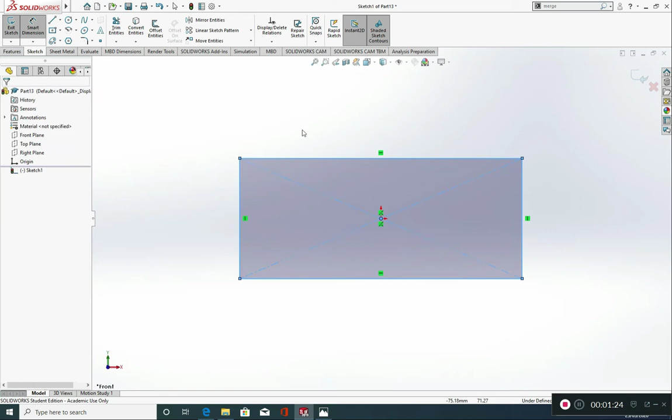So I've opened up SolidWorks and I've gone to File, New and Part. I've ensured that sheet metal is available on the tab by just right clicking on these tabs and ensuring that sheet metal is ticked. I'm going to go into a front plane, normal to, sketch, and I'm going to select a center rectangle. I'm going to sketch from the origin point and I'm going to give this some smart dimensions. So I'd like this value to be 150 millimeters. I would like this value to be 80 millimeters.

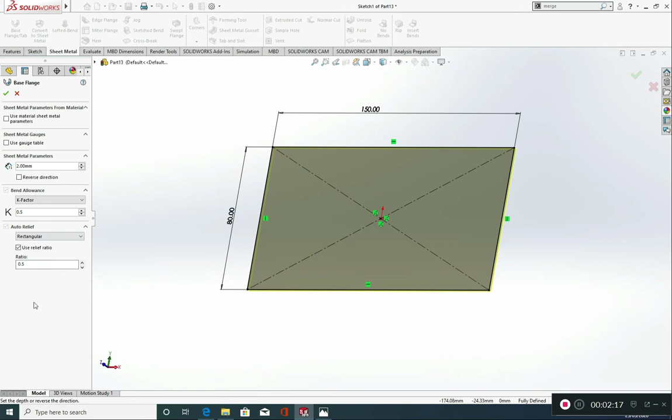I'm going to go into sheet metal. I'm going to choose base flange tab. I'm going to keep the thickness at 2 millimeters. The K factor is going to remain at 0.5. This is good for looking at bend allowance. And you can manipulate the K factor if the equations that you're looking at deem necessary to change this. Auto relief, okay, that's going to remain as well at 0.5. So I'm going to click the OK button, and we've got a sheet of metal there, 2 millimeters thick, 150 by 80 millimeters.

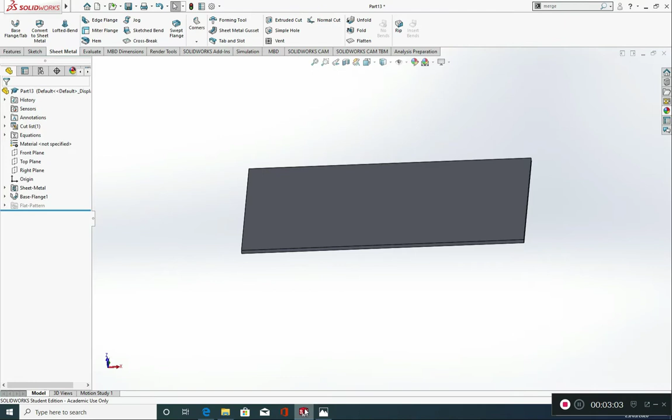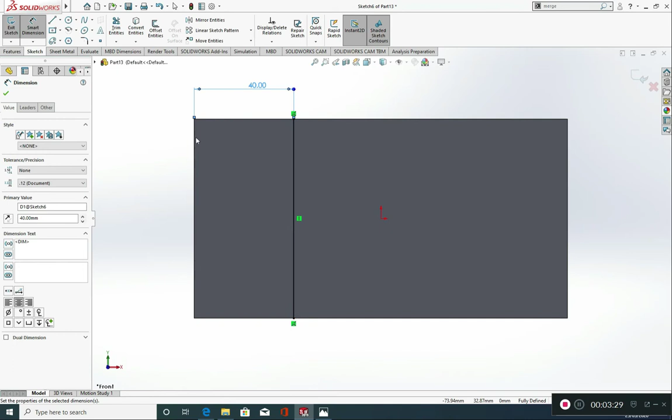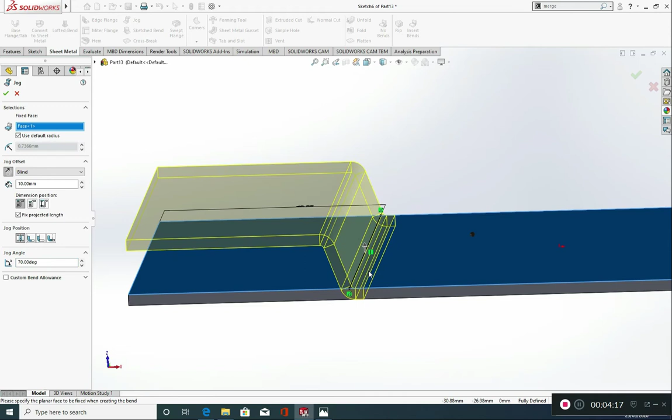So I'm going to go into sheet metal. I'm going to select jog, and the fixed face is here. So left click, and you can see what's happened now is it's jogged from that 40 millimeter line that we put in place right at the start. I want this to be 10, and I want to select the outside offset. The jog position can remain with the bend center line, and I want it to be 90 degrees. You can change this, so you could change it to 70 for example, and the jog would update. However, we want it to be 90 degrees. And green tick.

Perfect. Hopefully you followed that and you're in the same position as me. If you are, well done so far.

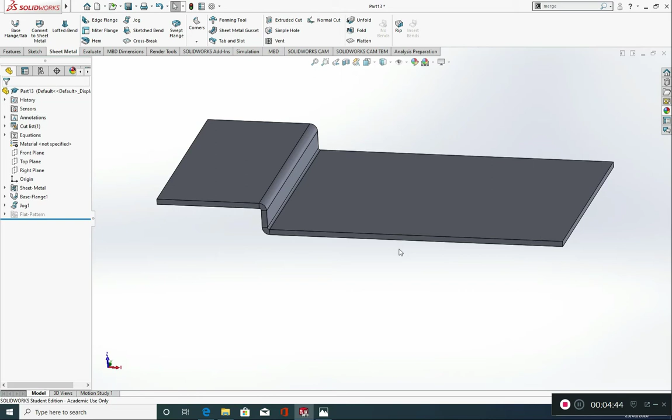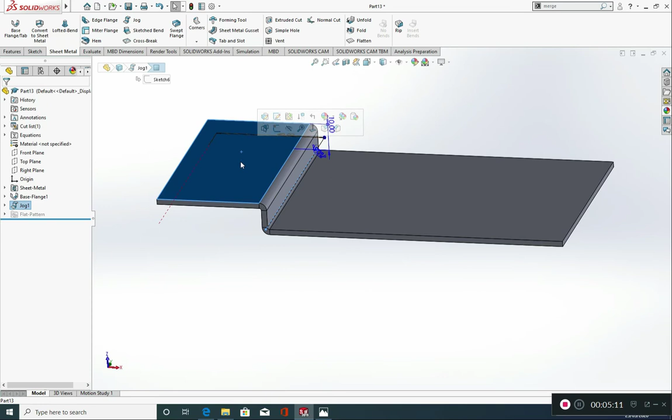Let's go to sketch, let's go to circle, and let's just sketch a circle in and give it some smart dimensions. So smart dimension, from this edge to the center I want to be 10, and from this edge to the center I want to be 10. I would like the diameter of the circle to be 5. Green tick. And we're now going to produce a linear pattern from this.

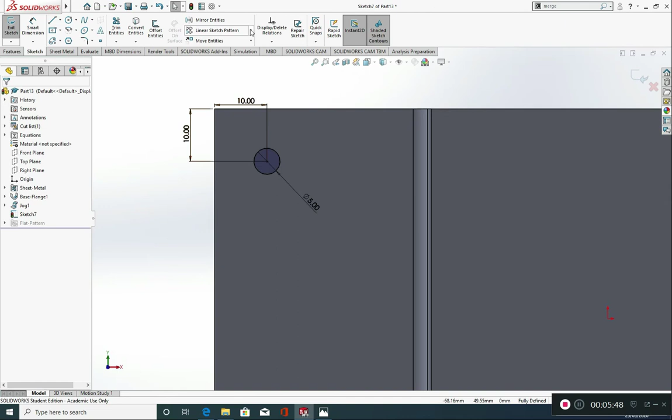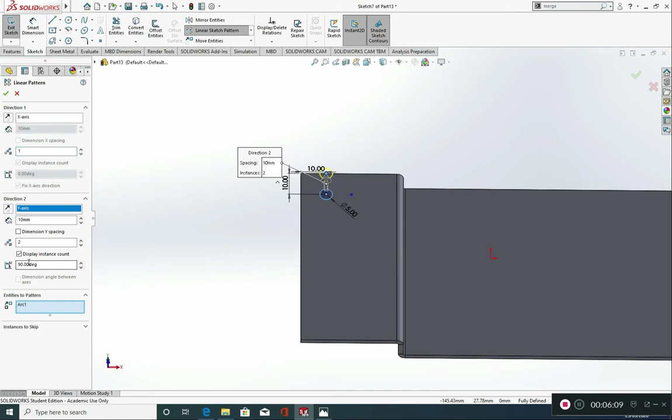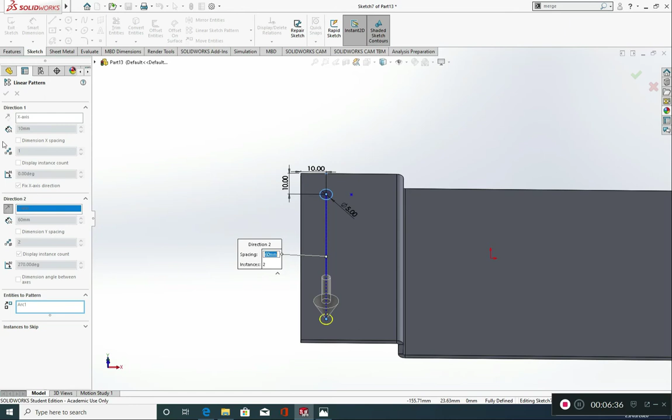So linear sketch pattern. In the y-axis we want to put 2. Entities to pattern is this. We need 1 in the x-axis. We need to reverse the direction in the y-axis, so just left click on the reverse direction. And we want this to be 60 millimeters for the distance. So the spacing 60 millimeters, and instances we've got 2. You can change it in here if you want, however I prefer to change it over on the left hand side. Once you've done that, you can press the green tick, and we're going to go into sheet metal now.

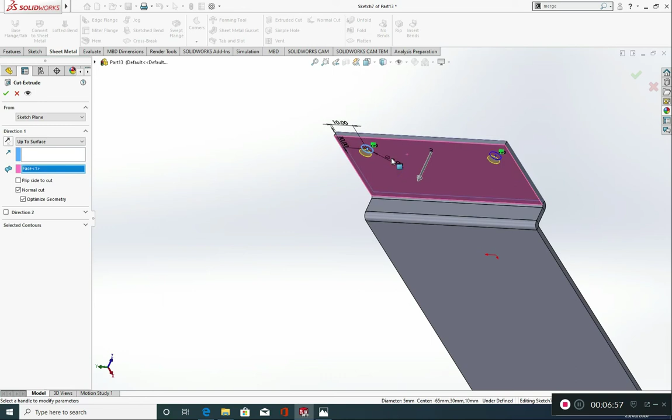We're going to do an extruded cut, and we're going to choose up to surface. I'm going to click on this surface underneath. We could have gone to blind and put in the thickness, so 2 mil, and that would have the same outcome. Green tick.

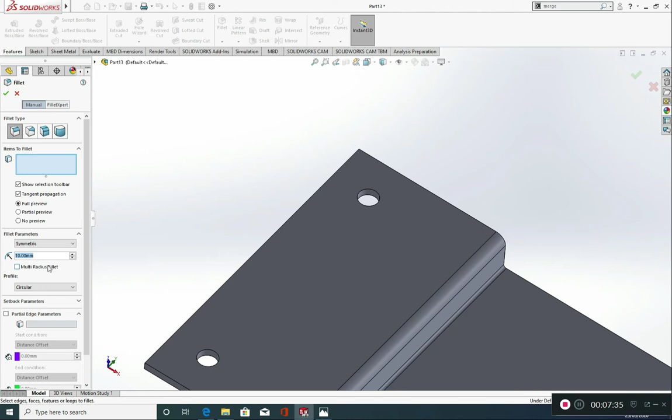Now if you wanted to, you could indicate that these holes were deburred by going into features. You could fillet them with a fillet parameter, change this value to maybe 0.5. Click on the outer edge of these circles and green tick to say that these holes were deburred, and you could do that on the other side as well. However, that is not included in this particular drawing that we're doing, so you can remove the fillet if you want. Just right click and delete. Yes.

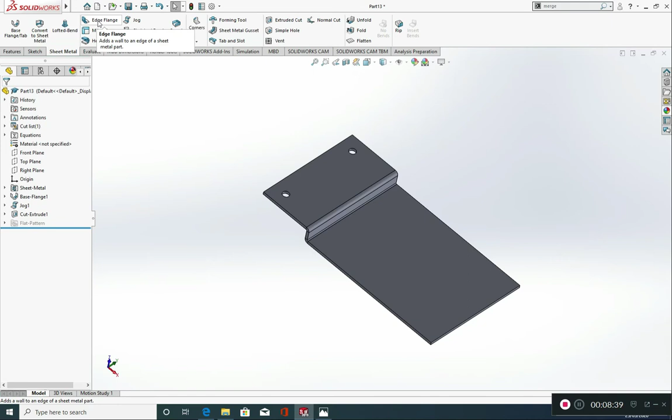Next bit, let's have a look at the teardrop on this side. So we've got a teardrop, but we've also got this edge flange as well. So we're going to produce an edge flange, and we're going to give it what's known as a hem, and that's going to come in the form of a teardrop. So into SolidWorks, let's go to sheet metal, and we're going to create an edge flange. So left click on that, I'm going to left click on this edge, move our mouse up and left click. We're going to change this value here. For our edge flange, we want it to be 20 millimeters.

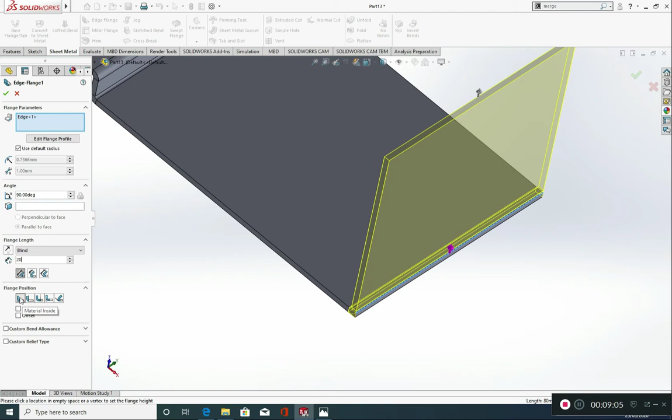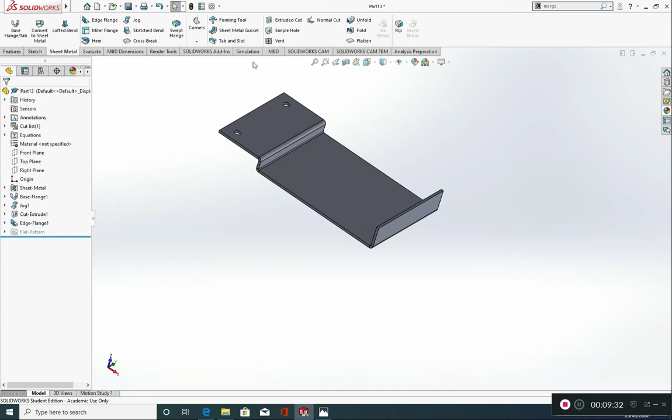We want the material to be on the inside, and we're going to press the OK button. Good. Right, now let's create that hem that appears here, coming over the top. So we're going to go to the sheet metal tab. We're going to find a hem. And we're going to click on the edge that we want to produce the hem from. So left click.

So in order to produce this hem, what we need to do is we need to find hem on the sheet metal tab. So we're going to go to hem, we're going to click on the edge that we want to hem, and we must ensure that teardrop is selected. Okay, now this is actually going the wrong way, so we need to reverse the direction, like so. You could, if you wanted to, just close out of that.

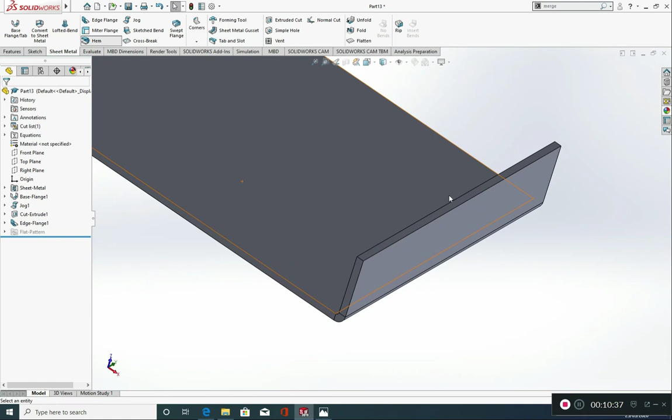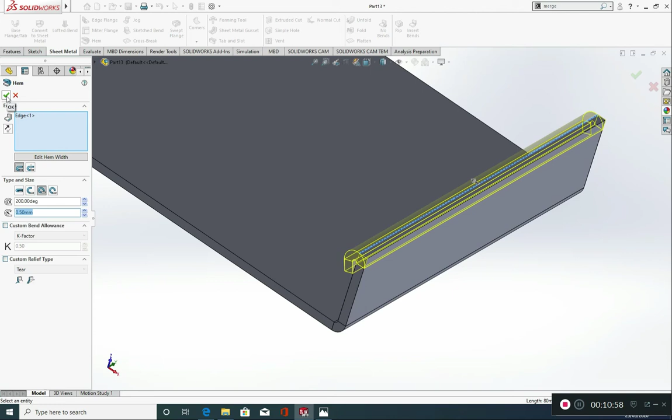You could have gone to hem and selected this edge, teardrop selected, and there would be no need to reverse the direction. We're going to keep 200 degrees in here, and we're going to keep 0.5 in here, and you can see our K factor's already in there as default at 0.5. And we're going to green tick. There we go. There's our teardrop hem.

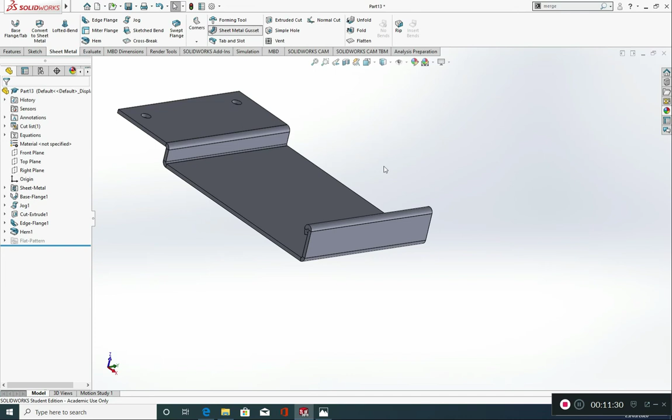Next, let's look at creating these rounded gussets. So let's have a little look. How many do we need? 1, 2, 3, 4, 5. We need 5. So we're going to go into Solidworks, and we're going to pick up the sheet metal gusset. Okay, the position for the gusset is on this face and on this face here, and you can see it's put one into position.

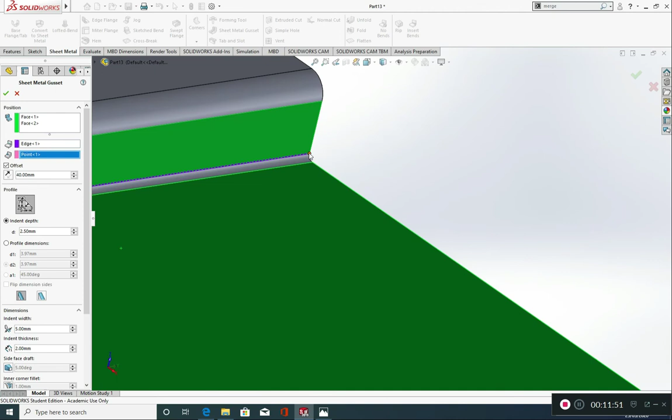The edge is here in purple, and the point is indicated here with this point here that's in pink. So we want this to be a rounded gusset at 2.5, and we want the offset to be at 40 millimeters, which it is. I'll just show you what happens if you change this. So if I put this at 20, it uses this point here, point 1, as a reference point, and it's going to offset 20 millimeters from this point. We're going to have ours at 40.

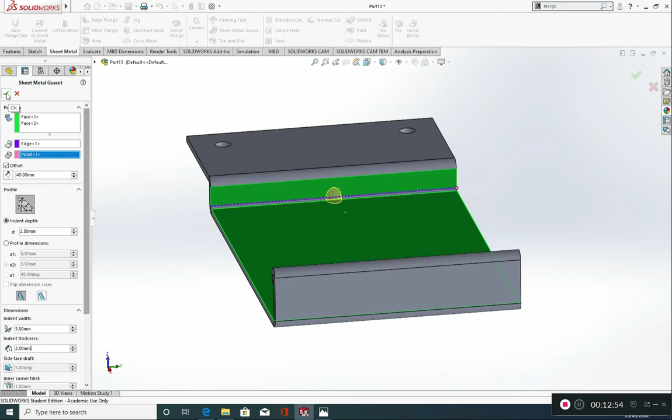The reason for 40 is we know that the distance of this line here in the original sketch was 80, so 40 is halfway. The values in here, 2.5, 5 and 2 can all remain the same, and we're going to click on the green tick. Perfect, so we've got one in place. Now the next thing we need to do is create a pattern from this. So we're going to go into features, and we're going to choose linear pattern.

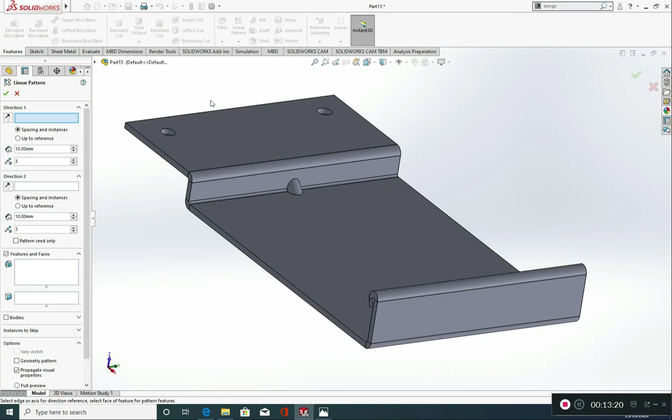We're going to go to direction 1, and we're going to choose this face here. Direction 2, we're going to choose this face here. Now features and faces, if I click on this, you'll notice it's going to start to produce the gussets across here. So I want them to be 3 with an offset distance of 15, and I want there to be 3 with an offset distance of 15 for this one as well. And we're going to choose pattern seed only.

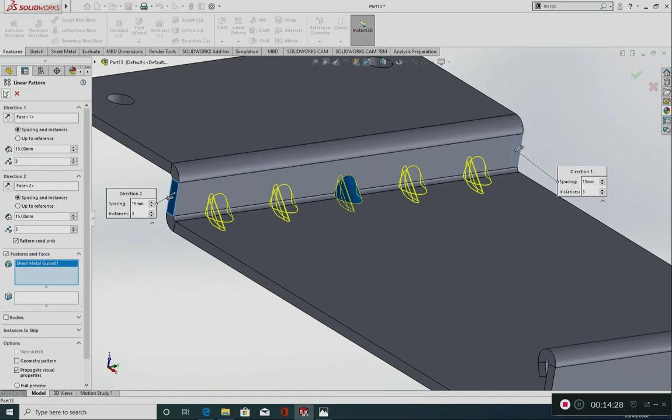What this does is the original gusset that we did is known as the seed. It's the first instance that we made a feature of. It's going to pattern this only. It's not going to pattern anything else, just the seed, which is this. And we're going to click on the green tick. Okay, and there we have it. There is the work that we've produced so far. There's the 5 gussets that we put down just a while ago.

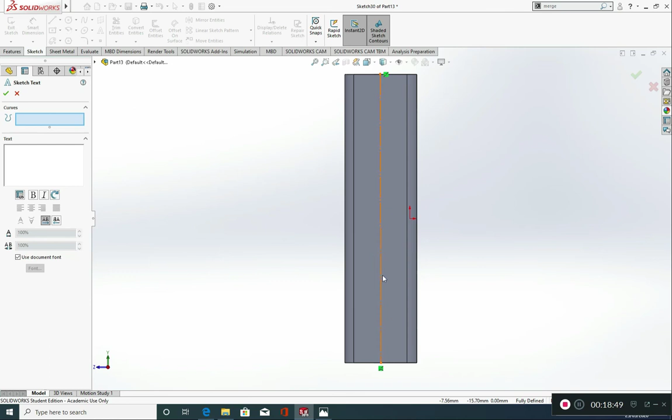We're now going to create the text that's on the side of here, Solidworks Station. So we're going to click on the face we're interested in, and normal to. So I'm just going to draw a center line. Let's click on this and turn it to for construction. I'm going to go to text. I'm going to click on this for my curve. I'm going to type in the text, Solidworks Station. Make it central. Green tick.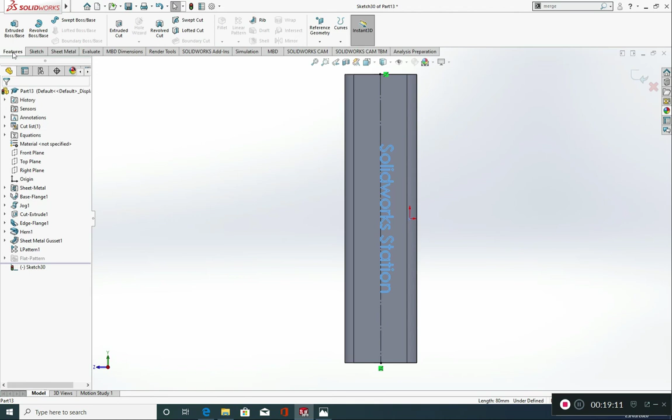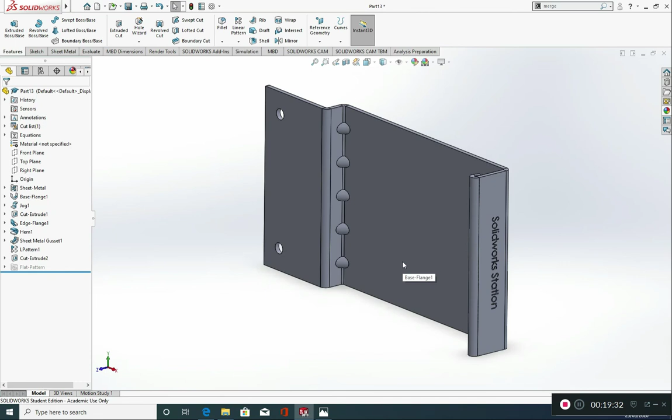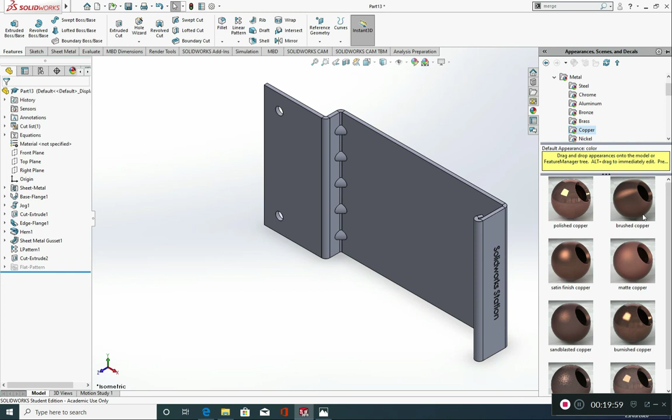I'm going to go to features, extruded cut. Take an extrude, cut it by, let's go 0.1 millimeters. And green tick. Perfect. Control 7 on your keyboard, and let's apply a material to it. So, into the appearances, scenes and decals. It will look like this when you first open it. Go to appearances, open up, go into metal, open that one up. You can go to copper, and let's use a brushed copper and just drag that on and select body.

Perfect. So that's been a tutorial on a few things in the sheet metal tab. We've looked at how to produce a jog. We've looked at how to produce extrude cuts. We've looked at how to produce an edge flange, a teardrop hem, rounded gussets, and we've also looked at producing this text as well.